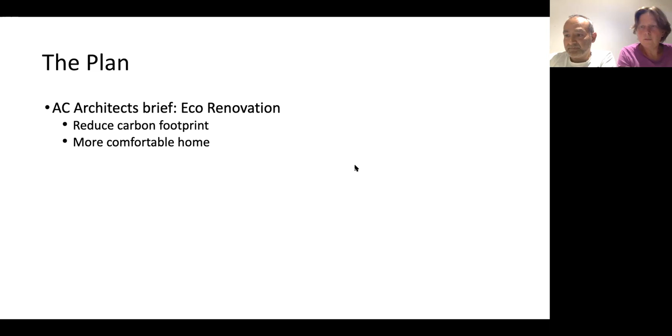Okay, so I'll just show you a few of these slides. On the next slide we're going to show a series of photos that show the whole process, but you can see a few things here during the construction. You can see that first of all, actually, there was a lot of destruction.

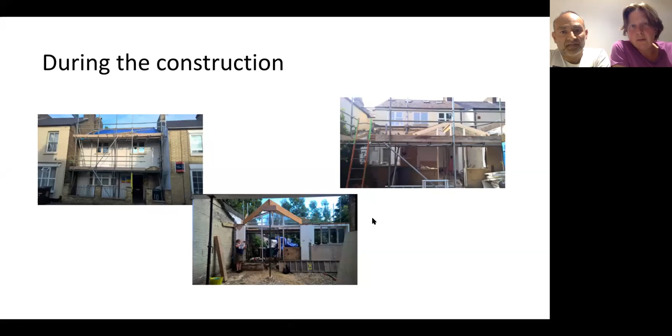Especially if you look at the middle photo, this is the same area of the back of the house that you saw on the first slide with the beautiful floorboards. Basically the back of the house doesn't exist anymore. For a few months, every time we went there, the house was less than it was before. And then if you look on the right-hand side, you could see more destruction there as well. So actually there was a lot of destruction before we started constructing again.

Okay, so this is kind of a zoomed out, I guess, a drone type of view of the destruction and some of the construction, I think. Maybe these photos go past very fast, but maybe it'll bring up some question or comment in your mind when we go through them.

Oops. Oh, we made it, okay.

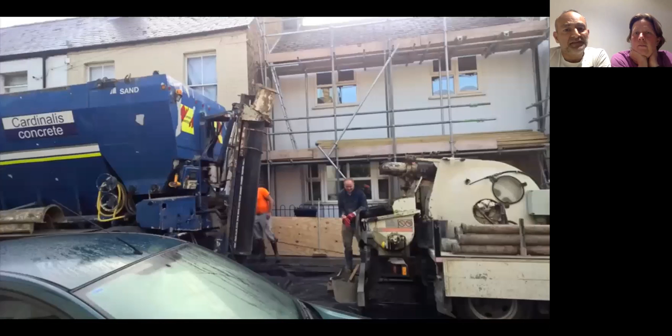So these are all in time order of the front, middle, and back of the house. This is all the front. You see the old windows and the roof is going off.

And then at this point they put, oh, sorry, oh no, okay. Just let it go. Okay, sorry.

So there's the solar cells going on the front. And then you could see the tiles are going on around the solar cells, so they didn't need tiles there. And these are new windows. And the pink stuff is the insulation. Insulation going on, yeah. And then now it's rendered. The render goes on top. And scaffolding finally comes down. That was a long time. That's the back of the house. Yeah.

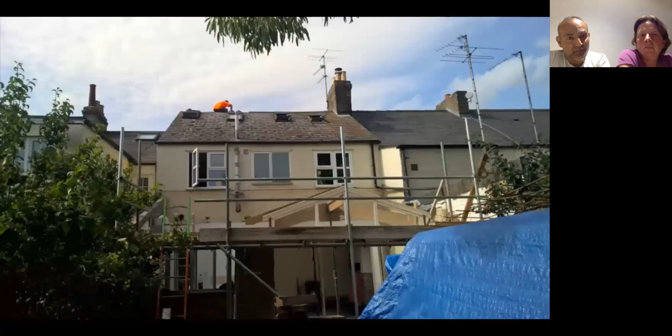And so you can see in these pictures, they're now building a new roof on top of the old roof. And there's more solar cells on the back. And that's the new windows and doors going on. And then the insulation again on the back.

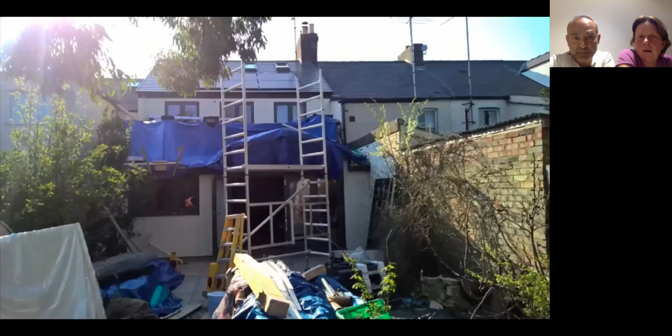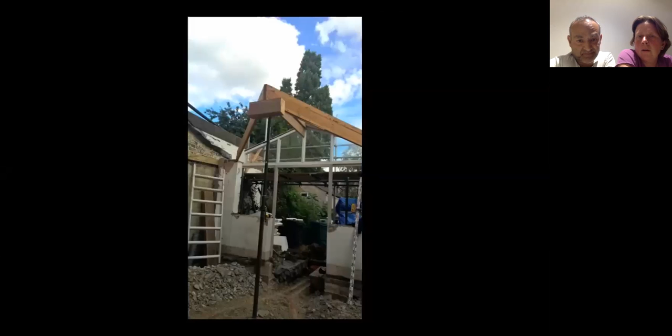This is the inside. So more destruction. That's the kitchen. And then they're starting to construct again now. So you can see there's a new wall and roof.

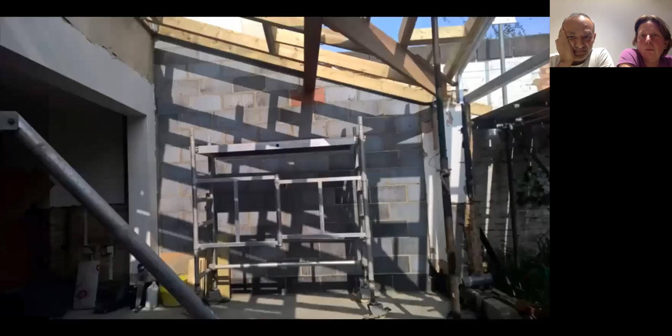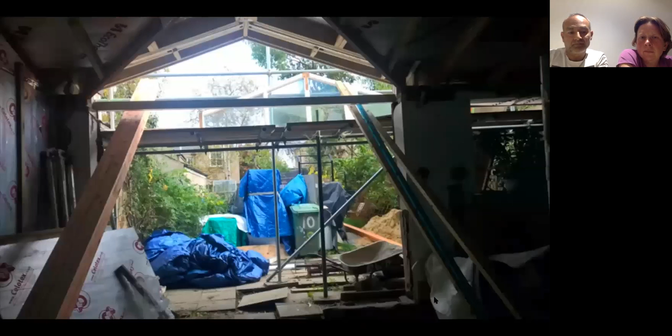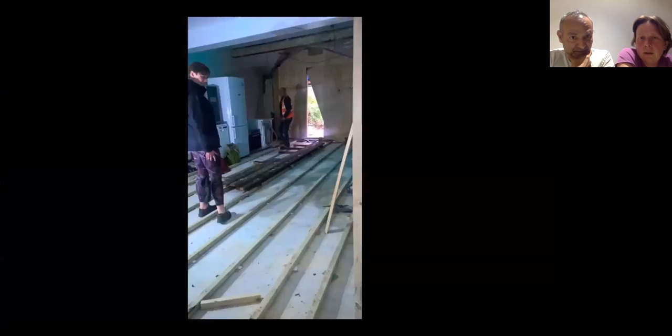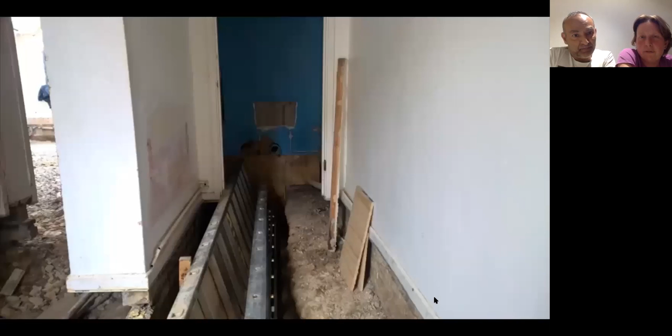The walls, and this is showing the inside with the floor insulation, and then it's nearly finished. And that's the new kitchen going in, and that's how it's finished. And then this is the front of the house, and walls.

Yeah, so we moved back in actually in February 2018. It took a bit more time after that for the house to be completely finished, but we were inside and we were okay. The net result is the house is very warm, it's not cold. There's much more light in the house. There's no damp at all. Previously, there were parts of the house that were really quite unlivable because of the damp. We use all of the house all of the time now.

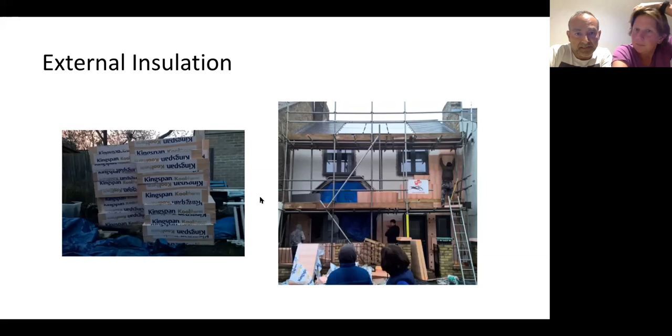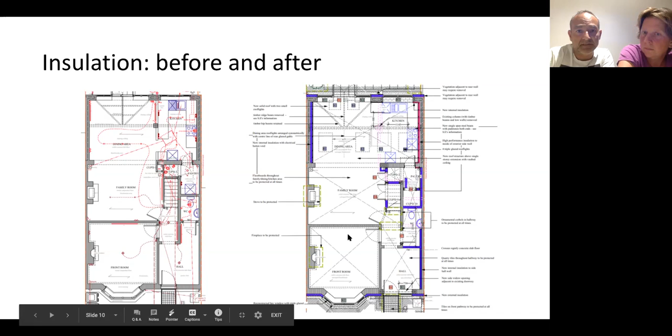Yeah. The other one thing I forgot to mention actually on the previous slide was windows. So we'll talk about floor and windows just a bit briefly here. So the windows we all upgraded to triple glazed units. So we don't talk about that anymore after that. So you'll talk about this thing? Yeah, I'll talk about this.

So then this is on the left side here. You can see where there's a little staircase. That's the stairs going up to the loft. And that's actually a very, very narrow staircase anyway. So we had to have the aerogel there because otherwise we wouldn't have been able to get the staircase up to the loft. So this is what the aerogel looks like. And that's 39 millimeters thick.

The stuff with the red dots in the middle is the damp-proof membrane that was installed by Anglia Property Preservation. And it's kind of this yellowy plastic stuff, but it's held in place by these red, well, nails essentially. I don't know what they are, but they hold it in place. So it looked quite fancy actually. We had that all over the ground floor of the house for quite a while.

It was quite nice. And then you can see that, so this is in our daughter's bedroom, the back bedroom. Here there's the Celotex 100 millimeters insulation in her room, which again was a non-party wall. So that's why we needed to have some internal insulation, because the house is set back, we didn't have party walls.

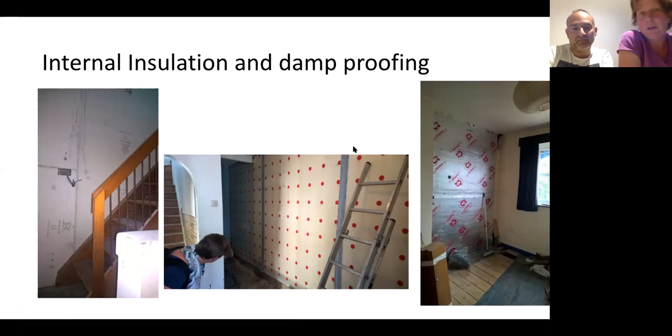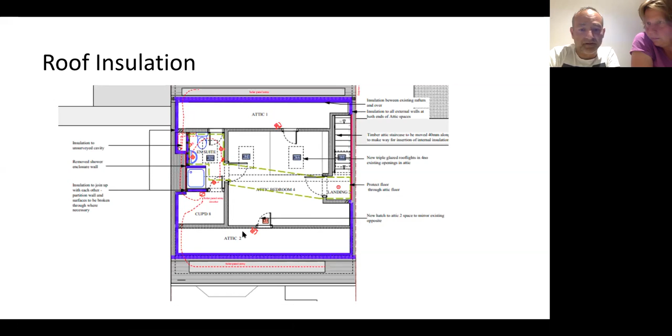Okay, so that's the roof. Not much to say here. Similar type of diagram. Essentially, there was no insulation here, and now the entire roof is kind of packed. Completely sealed with insulation. And here you can see it. So our architect Anne was very, very excited that we were a setback terraced house because she said I can put insulation between the rafters as people normally do, but also I can put insulation on top of the rafters

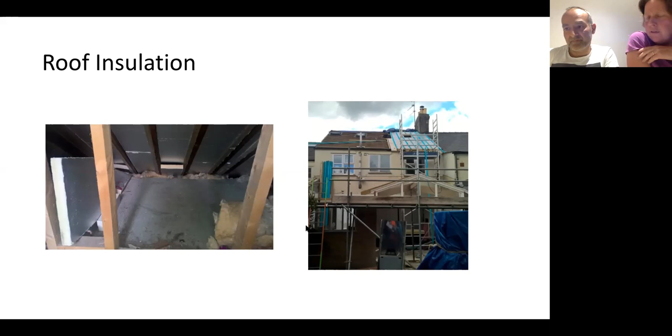as well. So essentially, on the left you'll see there's 50 mil insulation between the rafters. On the right, you can see on top of the roof itself, there's 80 mil of insulation going on top. So it's like an extra roof. And then of course, tiles went on top of that. So the roof is, I think, another 150 millimeters higher than it was before, something like that, isn't it? Yeah.

Okay, and this is the floor. So if you look in the second photo, the little photo, you can see how far down the builders actually dug, because this is our staircase going from the ground floor to the first floor, and you can see that there's a huge gap, and they've already put quite a lot of stuff back in. So during the destruction phase, when we wanted to go upstairs, we'd have to step up about a metre to go onto the stairs.

So the house, like all Cambridge houses, just had an earth floor underneath the floorboards. And in fact, when they began digging out, they found that there was no damp proof or anything like that on the floor. So what went in the floor was a damp proof course, a 125 concrete slab, then insulation, which is this middle picture, and then screed on top of that, and there are heating pipes in that.

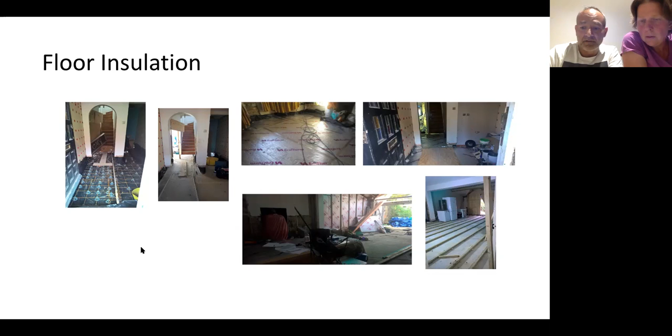So we lost the radiators on the ground floor, and then our old floorboards were put back on throughout the ground floor. That's the floor insulation, and just mentioning those floorboards. So everything we wanted to keep in the house was stored in the garden over the winter. Essentially, it was 6 months, starting from July well into February time. And these were the floorboards. They were kept in the garden.

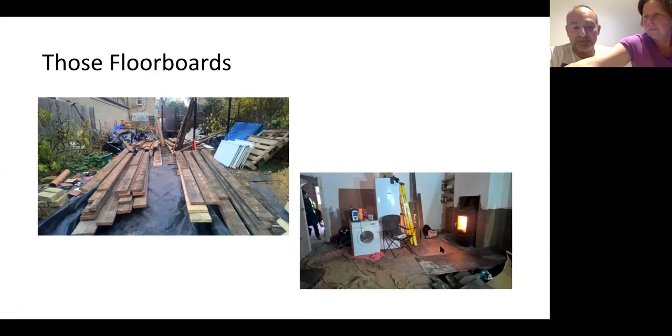A lot of white goods, all of our white goods. So fridge, washing machine, kitchen was all kept in the garden. The kitchen didn't survive. But everything else did. When the floorboards were laid back again, they were laid throughout the house, and then our wood burner did a lot of work for several days, just burning intensely to dry them out.

And at that time, someone came to the house and they said, "Oh, that's no good. Your house is east-west facing. You're never going to be able to generate enough." So we kind of thought, "Oh, well, maybe we won't be able to have that." But actually now, firstly, solar cells are much cheaper, but also they're much better quality than they used to be.

And actually, we've got a 4 kilowatt array made by SunPower. There's 6 on the back of the house, 6 on the front of the house. So obviously in the morning, the ones in the back, east facing, generate the most electricity. In the afternoon, the ones in the west generate the most electricity.

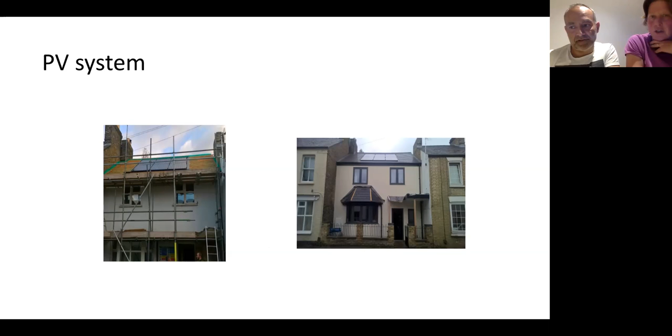And I think you saw in the video earlier that the solar cells were fixed straight onto the roof, and then the tiles were placed around them. So it's completely flush. So it looks pretty good actually on there.

So then this is how it works. Well, this is what we do with it. Yeah, you can say this. Oh, right, I'll say so.

So you can see there's my picture here of solar cells. Solar cells generate DC, direct current, but obviously in the house we need to use AC. So we have this converter which converts it from DC to AC. So the first thing that happens to any electricity we generate is it goes to the house for any demand that we have, and then the second thing is that we have this enormous hot water tank which is 300 litres, it's 2 metres tall.

It's an enormous hot water tank, which was interesting because they had to find somewhere to put it, and in fact had to end up moving the downstairs toilet forward so that we could put the water tank under the stairs, because that was the only place that it could go, and it had to be vertical. So that heats up all our hot water, and as we've got 2 teenage children, it's really useful that we've got a lot of hot water so that we can all get enough for a shower.

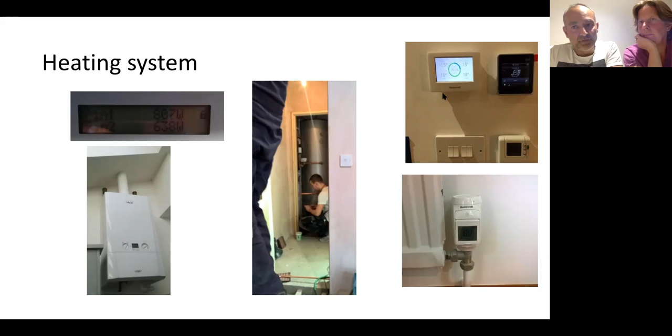So it's quite a neat system. And it's a really good system. Yeah, you can set up zones for rooms, and you can control timings and temperatures for all those things. Okay, so that's the end of the technical section.

So are there any questions, Matt? Sure, yeah. Just to encourage everyone to keep asking their questions in the chat. But first off, hopefully, Erica, your question was answered there around the PV electricity generation. But feel free to ask a follow-up question if it wasn't. No, that was perfect. It's exactly our situation. It was a really helpful answer. Thank you. Okay. Fantastic. And then there's a question from Norman. Norman, do you want to ask your question around moving out?

I think you nearly answered it before, but how long did you move out for? We were planning to move out for 6 months. Actually, the next slide will answer some of that question. So we were planning to move out for 6 months initially. I think the plan was 7 months. It took a bit longer than that, so it was 8 months.

It was 8 months because we were in a rental property, which initially was 6 months, but then we had to give them a month's notice. It was difficult to work it out. We said, right, okay, we're going to move out on the 22nd of February or whatever it was. So then they knew that they had to finish the painting. They were finishing the painting on the morning that we were moving back in. But it was 8 months.

Yes. So we moved out at the end of June, the 1st of July, something like that. Moved back in February, but the work wasn't finished in February. So it was April when the work was finished. Well, the internal work. Okay. Great.

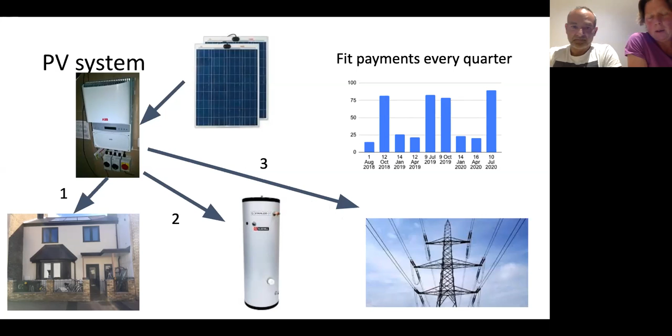And there's a question from Colin and Sandra around heating systems that I'm also personally interested in. Do you want to unmute yourselves and ask your question? Yeah, taking into consideration fossil fuels, and bearing in mind the trend towards electricity for the future, could you have done without the gas boiler? Good question. Yeah, I think we thought about that afterwards. I thought, should we just try not to get a gas boiler at all?

It's mainly cooking actually at this point. It's mainly cooking that we use. So yes, I suppose we could have, but we've always liked having a gas cooker, a gas hob. We have an electric oven. But I think also, if you can get renewable gas, then that's not so much of

an issue perhaps. I don't know, but then they've said that gas boilers are going to be phased out by 2025 or something. So we might be stuck then. Perhaps if you get the battery, that will help you out in that respect. Yeah, that will. And then I suppose we can change our hob over, so then we should be fine.

I think price, I mean, it's not a big point, but gas is still much cheaper than electricity. So heating water is still... but that shouldn't really be a consideration, or it should be a small consideration if you're trying to eco-renovate your house, I think. Yes, and the other things we thought of as well.

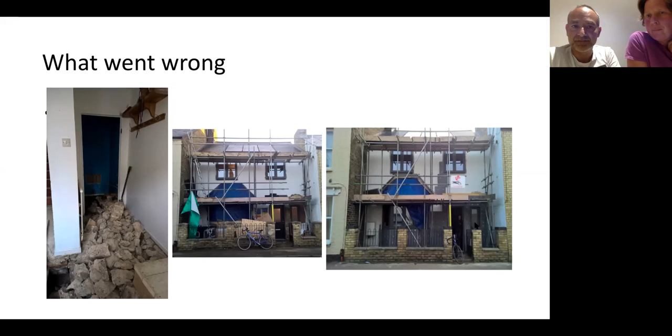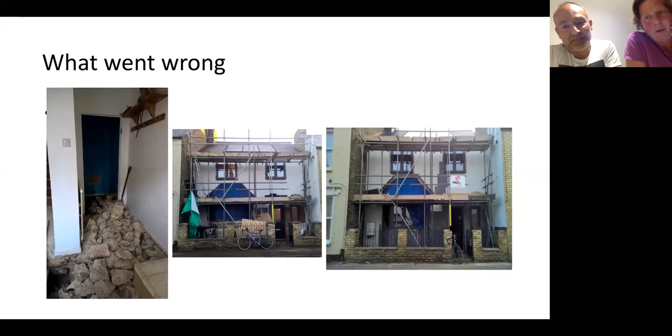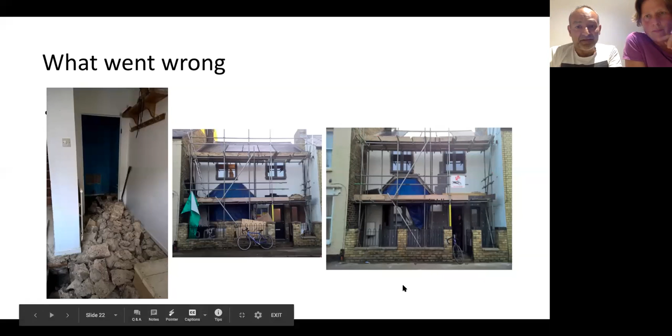So the one she had specified was K5 insulation, and we were a bit of victims of other global events at that point, because of Grenfell. It was a very similar insulation to Grenfell, and when the builders asked for that type of insulation material, everyone denied that they ever did any insulation like that, and they never produced anything like that, etc. And so it was really difficult to buy. So eventually our small order got tacked on behind a big order in some factory somewhere, and the right one arrived. So it was a delay because the wrong insulation had come, and then we had to wait for the right one. So those are the things that went wrong.

So immediately we realized how warm it was, how light it was in the house, although it was quite blue in the downstairs room to begin with, because you can see the tarpaulin still on here because they hadn't finished the roof, because they hadn't finished the insulation. That was another thing actually: the builders didn't want the insulation guys to walk over their nice new tiles, so they didn't put the tiles on until the insulation was on. So that's why that was there. But anyway, it was really warm.

One thing we didn't really think about was that it was incredibly quiet, because the house is triple glazed. It's unbelievably quiet inside, because our street's quite a busy street, but you don't notice at all. So we don't spend much money on our bills. And a really great thing was that we moved house twice in 8 months, so we threw away loads of things. So that was really good. We went to the charity shop so many times.

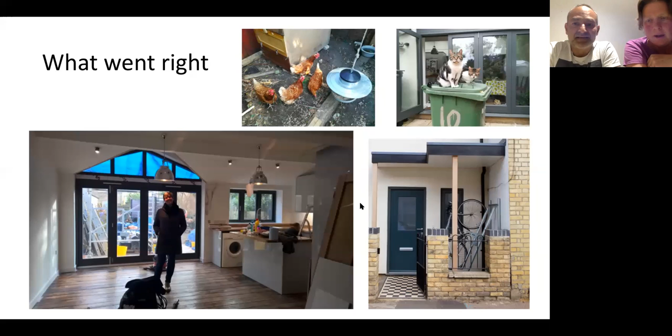Any more questions, people? So I think it's conclusion time now, but we could have a few more questions after we've done the main finish. Maybe you can unshare your screen. So, well, thank you, Zoe and Samin. I've got so many fresh ideas from what you've shown us. It's been a real pleasure. Thank you. I've got a few more things to share in closing up.

But first of all, I'm going to run a poll. So I'm launching a poll now. This is just to see your feeling about this tour. Has this tour made you more likely to create an eco home? You can just respond to that, and that gives us a feel for how much impact we're getting. Quite a few people are saying, I already have an eco home. Excellent. I'll give you maybe 10 seconds more to take this decision.